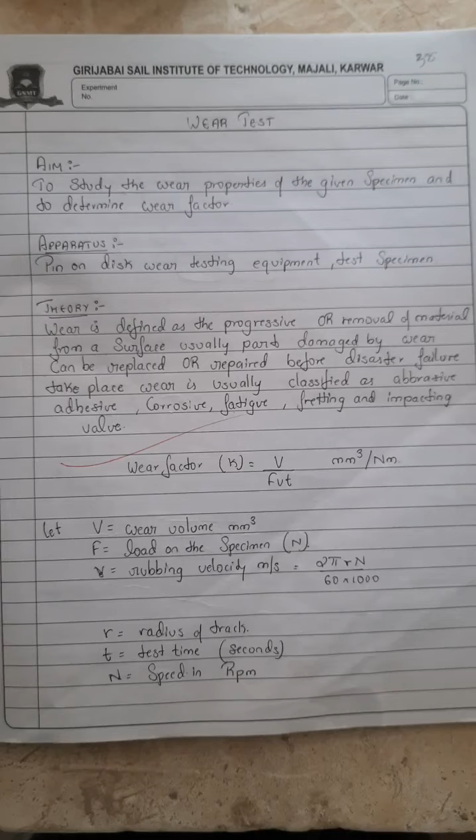Material Testing Lab, experiment number 7, wear test. Aim: to study the wear properties of a given specimen and to determine the wear factor.

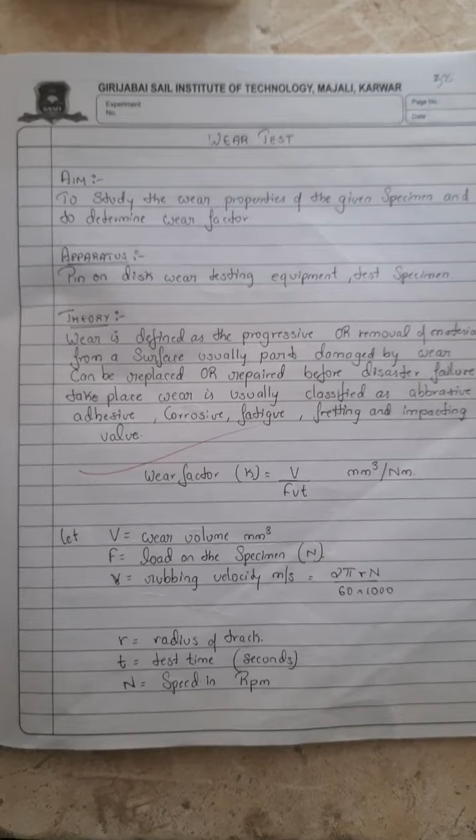Apparatus: the pin on disc wear testing equipment and test specimen. These are the test specimens: mild steel, brass and aluminium.

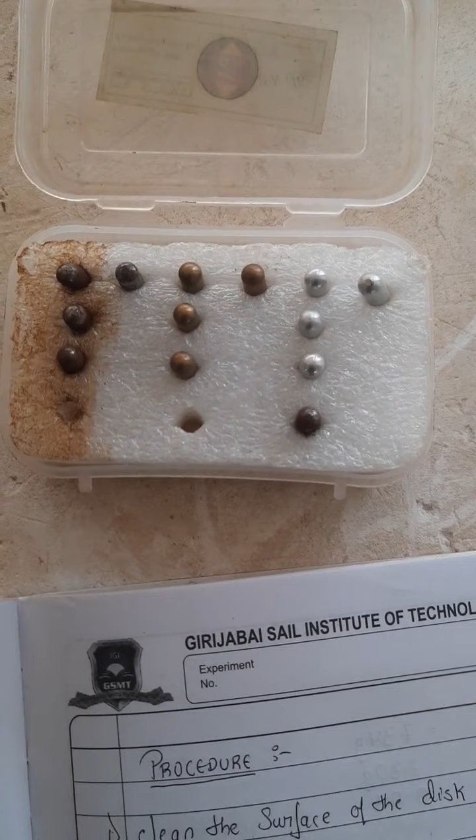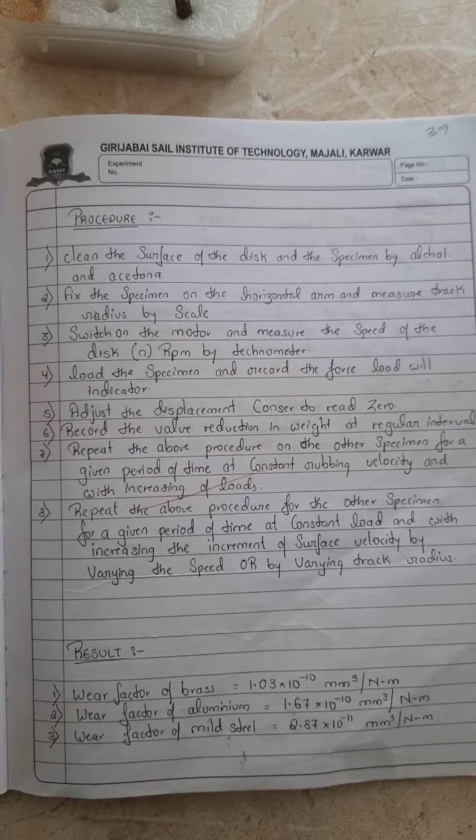Procedure: first, clean the specimen surface of the disc and specimen with alcohol or acetone. Fix the specimen on the horizontal arm and measure the track radius with a scale. Switch on the motor and measure the speed of the disc in RPM using a tachometer.

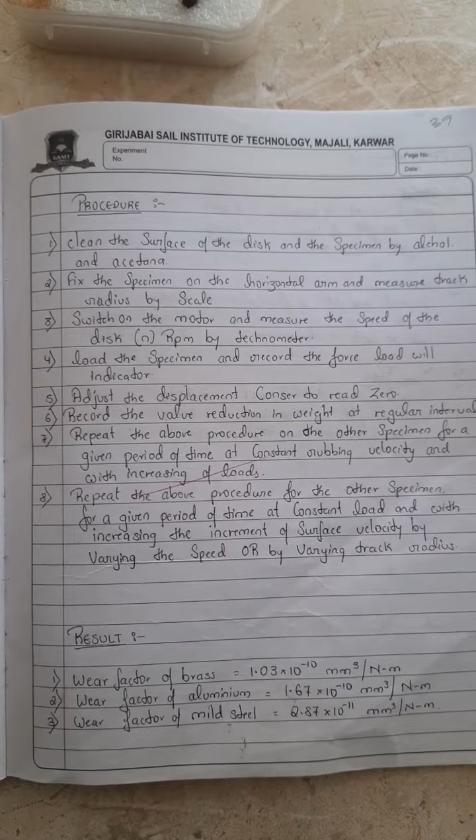Fourth, load the specimen and record the force load with the indicator. Fifth, adjust the displacement sensor to read zero. Sixth, record the value of reduction in weight at regular intervals.

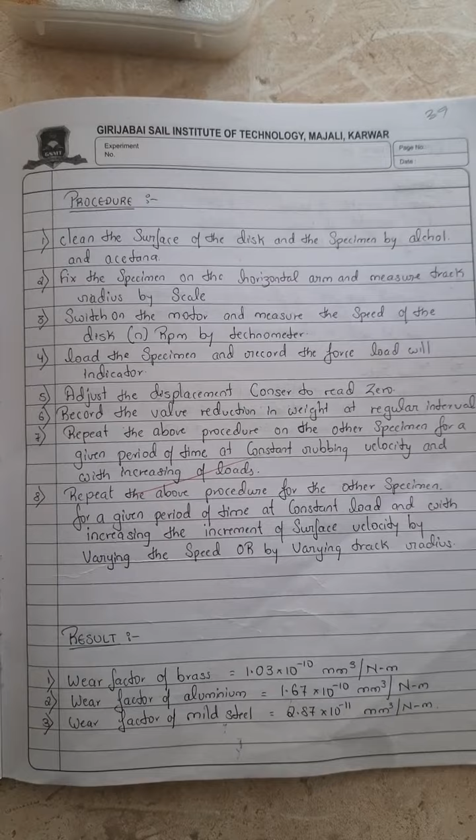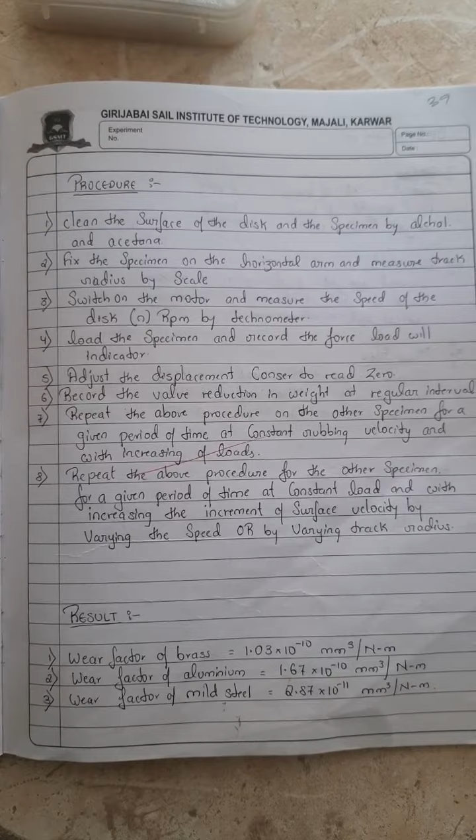Seventh, repeat the above procedure on the other specimens for a given period of time at constant rubbing velocity with increasing loads. Eighth, repeat the procedure for the other specimens for a given period of time at constant load with increasing surface velocity by varying the speed or track radius.

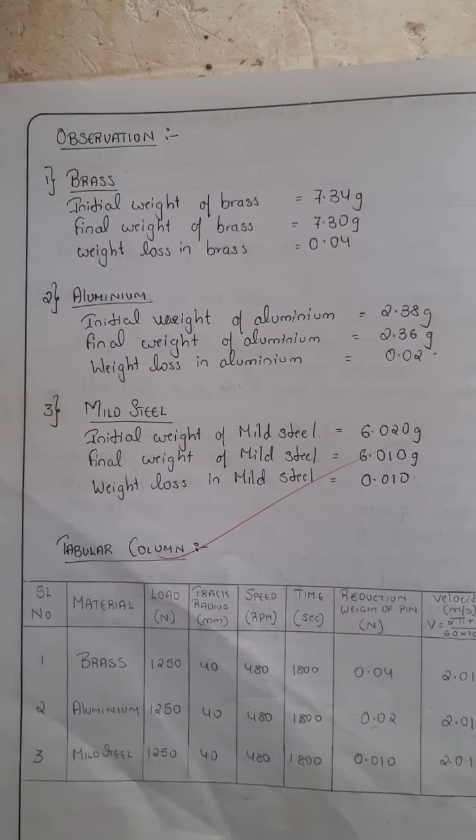Observation: here we have three specimens - brass, aluminium and mild steel. Presently we will take the aluminium and measure its initial weight.

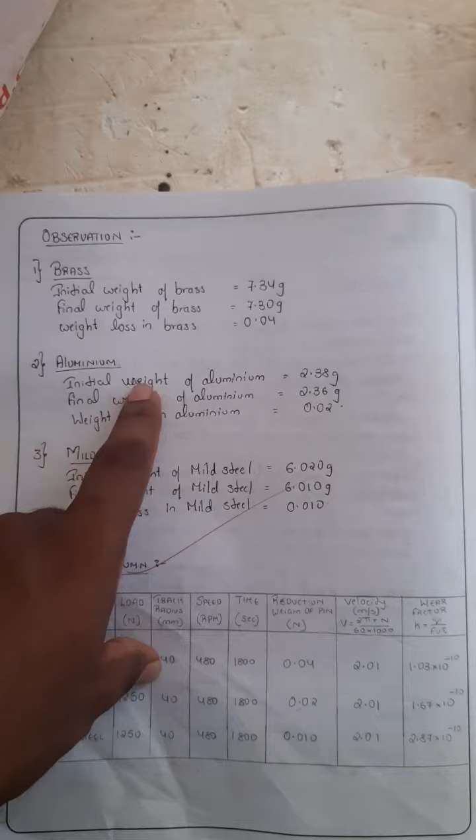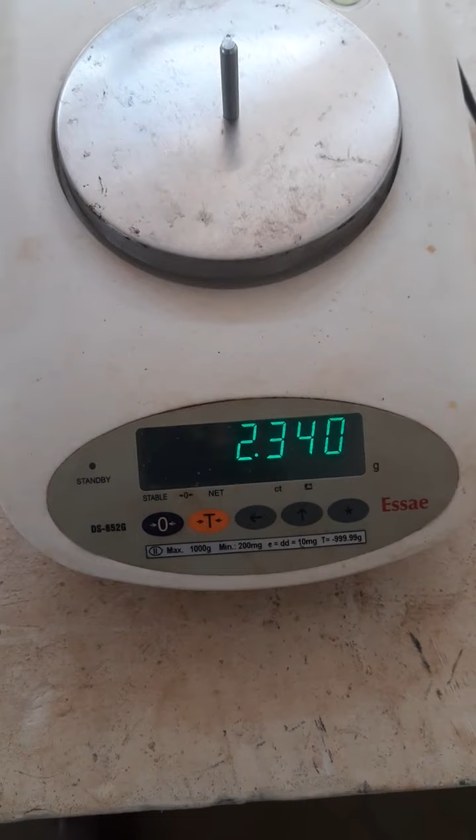For the first observation, you have to measure the initial weight of the aluminium. This is the scale. The aluminium specimen is being placed, and it reads 2.34 grams. Note down the initial weight of the aluminium.

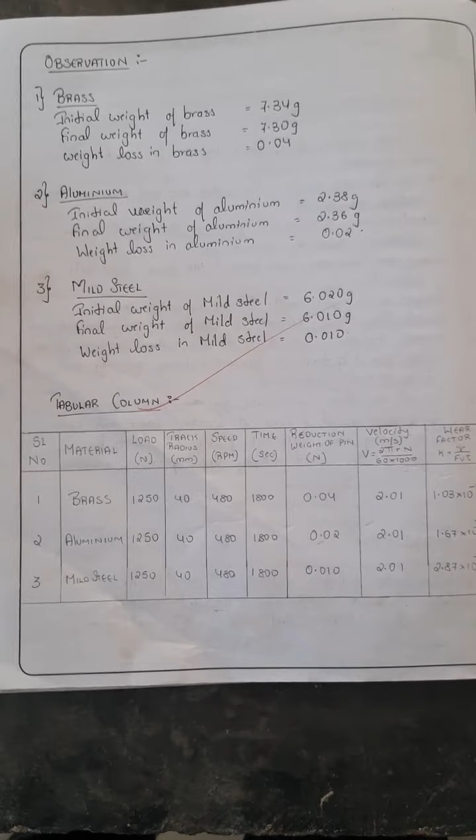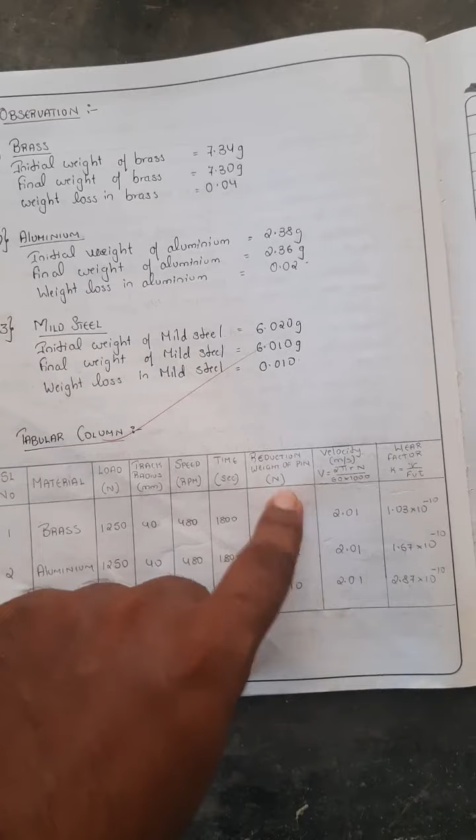Draw the tabular column with the following fields: material, load, track radius in mm, speed in RPM, time in seconds, reduction of weight of pin W, velocity in meters per second, and wear factor K.

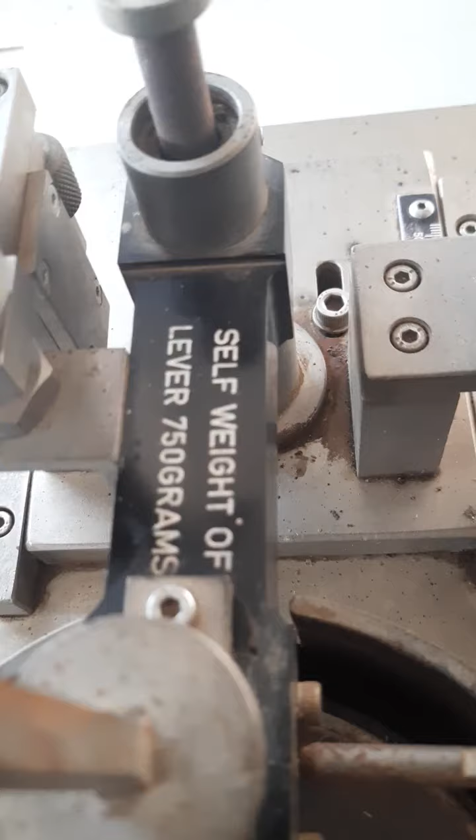Now the aluminium specimen is fixed to the wear testing machine. The self weight of the lever is 750 grams. In addition, 500 grams is added on the lever to make a total pressure of 1250 newtons.

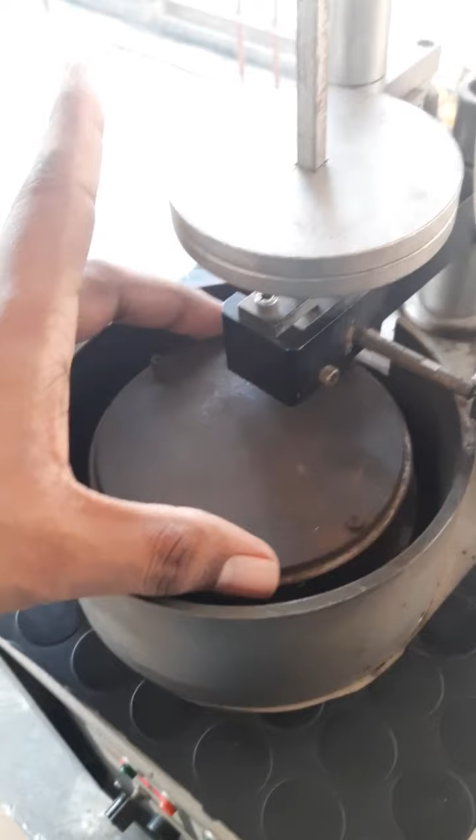Now measure the track radius. This is the track radius of the specimen. The disc is 80 mm in diameter, so the radius will be 40 mm. Note this down in the tabular column: load total is 1250, track radius is 40.

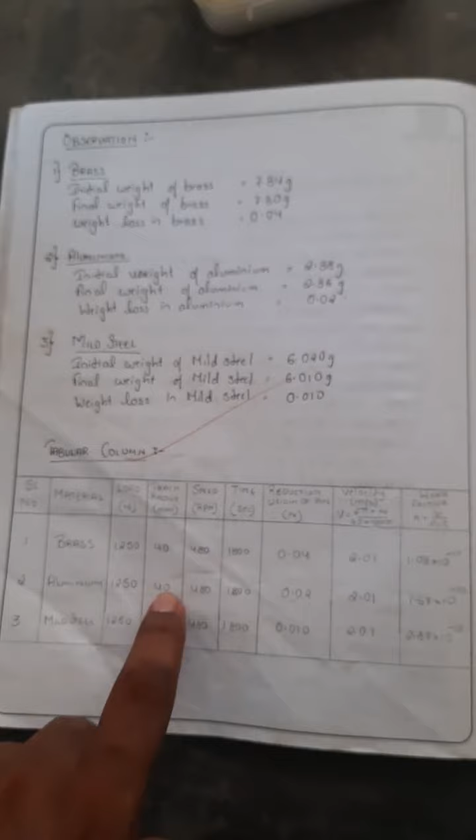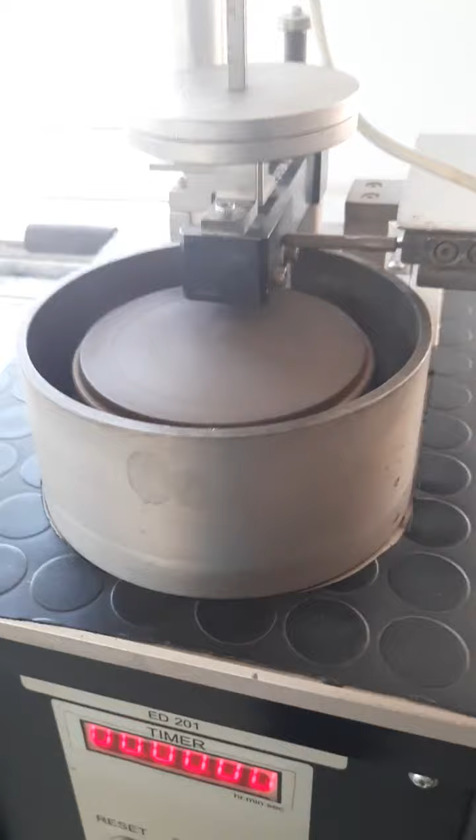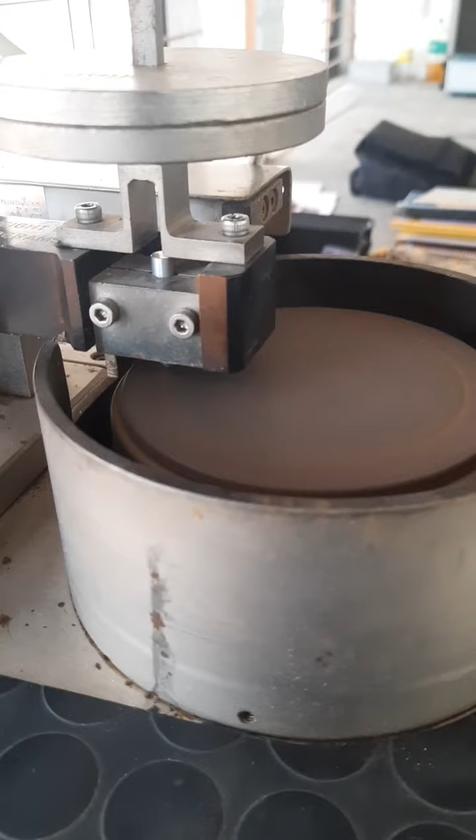Now start the machine and set the timer to 30 minutes. The wear test machine will start, and the specimen is rubbed against the rotating disc. This goes on for 30 minutes, so we have to wait until the experiment completes and the disc stops rotating.

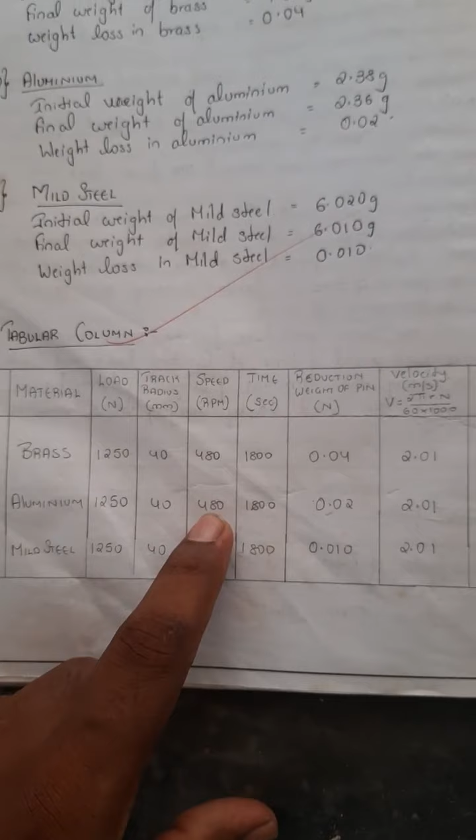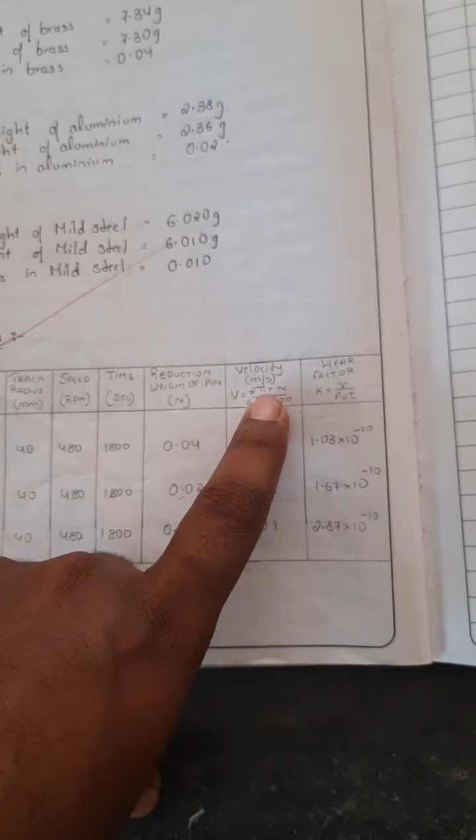After 30 minutes, stop the machine and remove the weights and the specimen from the attachment lever. Note down the constant speed of 480 rpm. The time of 30 minutes in seconds is 1800 seconds, and the linear velocity, calculated by the formula 2 pi R n by 60,000, is 2.01 meters per second.

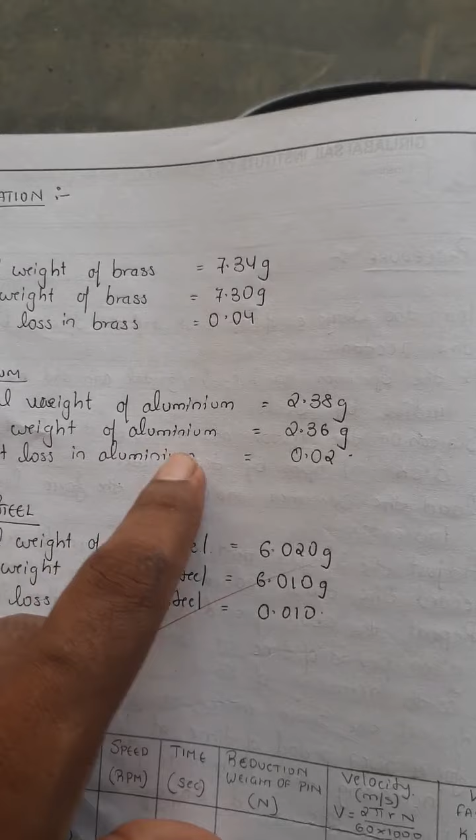After finishing the experiment, remove the specimen, place it on the weighing machine once again, and note down the final weight of the aluminium, as you can see.

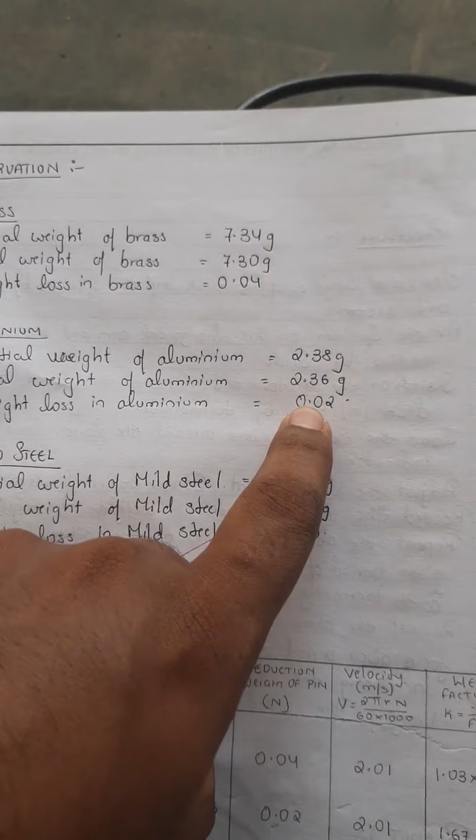Now calculate the weight loss in aluminium. This was the initial weight, this was the final weight, so the weight loss is 0.02. Note it down in the tabular column.

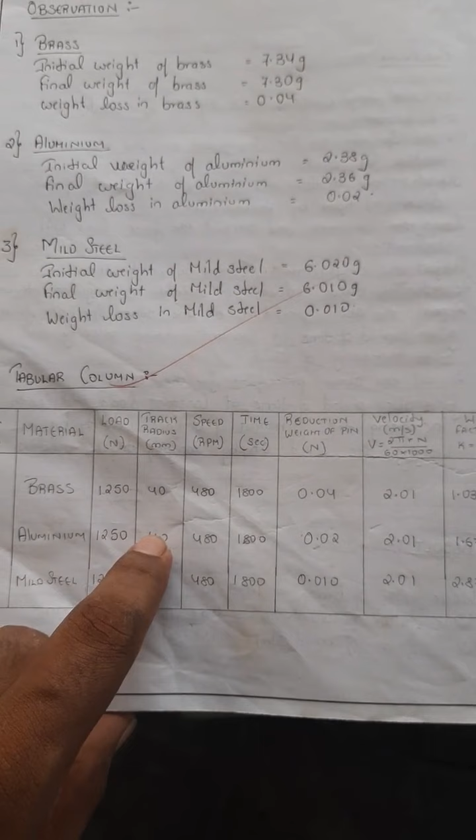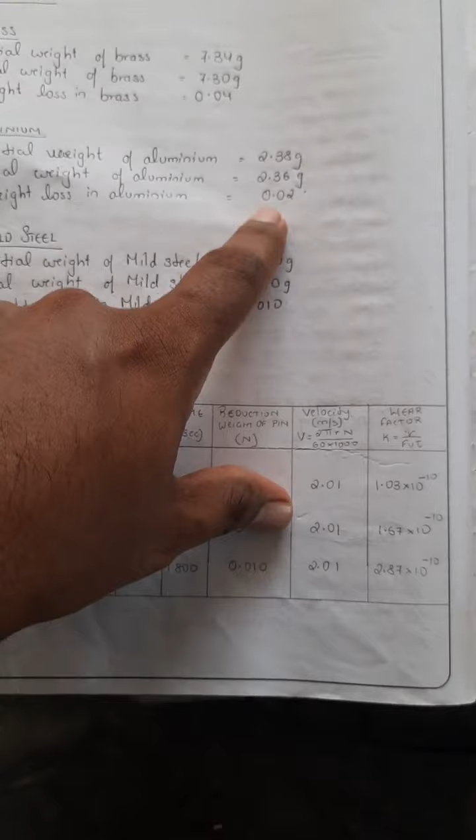Now the known values are: load 1250, track radius 40 mm, speed 480 rpm, time for 30 minutes is 1800 seconds, reduction in weight is 0.02, and velocity is 2.01 using the formula 2 pi R n by 60,000.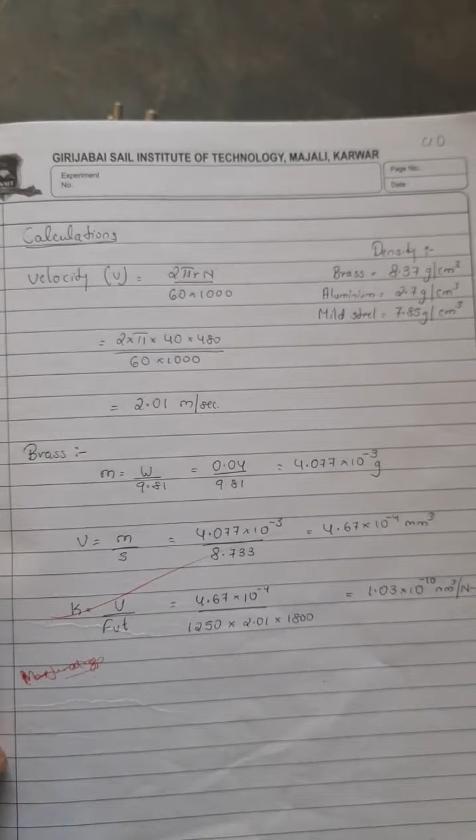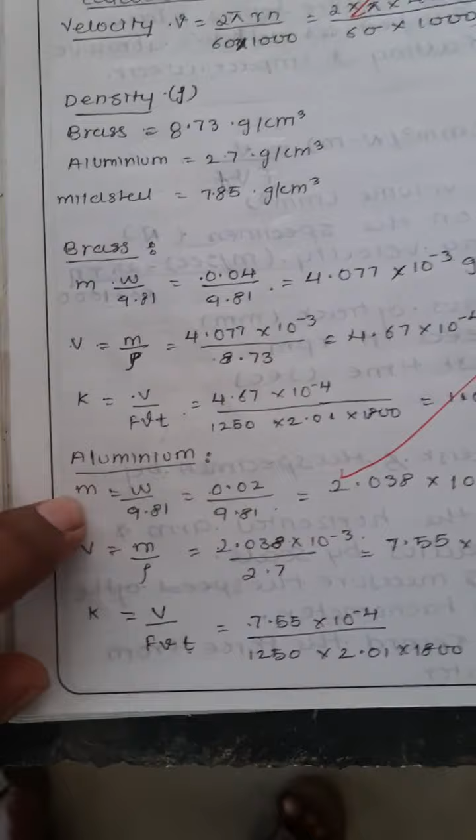Now we have to calculate the wear factor. For aluminium, note down the density as 2.7 grams per centimeter cube. After finding the weight loss, we calculate the wear factor for aluminium. First, note down the mass lost for aluminium: weight lost divided by 9.81, that is 0.02 divided by 9.81, which gives 2.038 x 10^-3 grams.

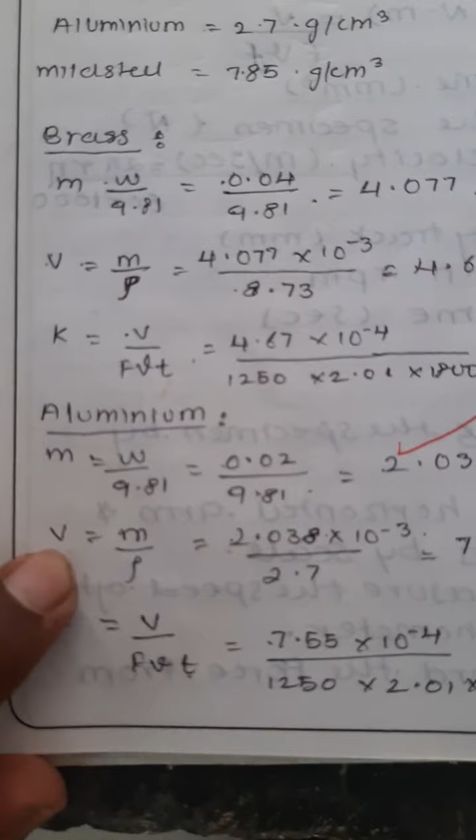Next, find the volume of aluminium lost: volume equals mass divided by density. Mass is 2.03 x 10^-3 divided by the density of aluminium, 2.7 grams, therefore the volume lost is 7.55 x 10^-4 mm cube.

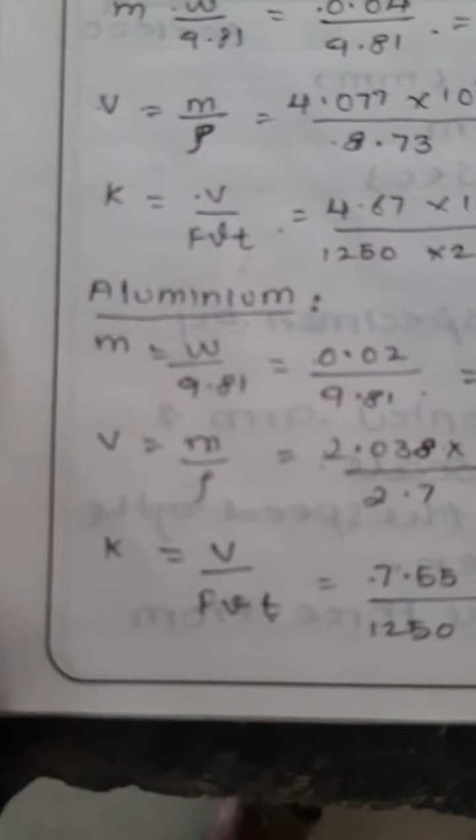Finally, the wear factor formula: wear factor K equals V upon F, v, t, where V is the volume, F is the load applied, v is the linear velocity, and t is the time in seconds. So wear factor K equals volume upon F times velocity times T.

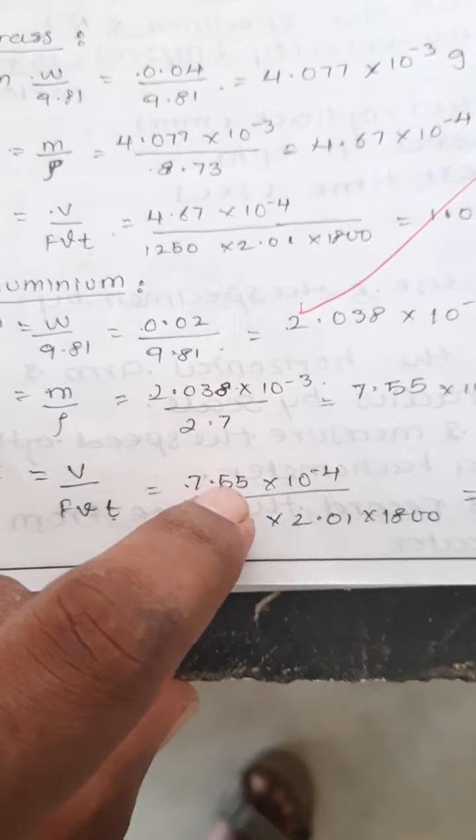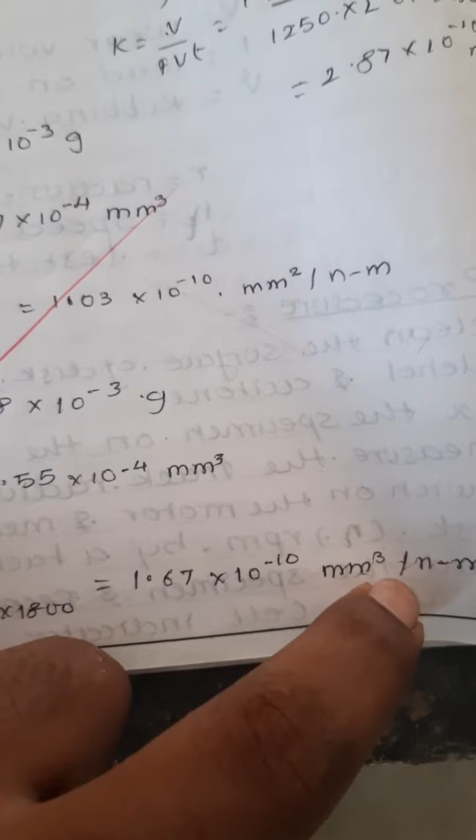The volume is 7.55 x 10^-4, the load applied on the lever is 1250, the linear velocity is 2.01, and the time is 1800 seconds, which gives 1.67 x 10^-10 mm cube per Newton meter. So this is the wear factor value of aluminium.